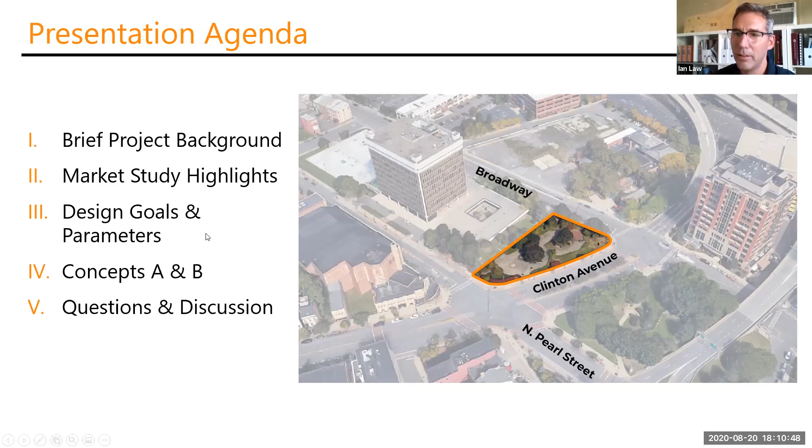In 2018, the City of Albany was awarded the DRI for the section of the city referred to as Clinton Square. After a 6-month planning project, as Ashley said, 12 projects were announced, and this was one of them. The planning process envisioned diverse pop-up retail installments by local artists, signature events, enhanced pedestrian connectivity, and a venue for authentic local and regional experiences. So the market study that's been part of this project has followed to assess the viability of this as that market collective and a viable gateway into this section of downtown.

So I'm going to switch over to the market assessment and review some of the key findings. Please forgive me for reading this piece, because until an hour ago someone else was going to be presenting it, but I'll go over the highlights.

One real key piece has been that it really needs to be multi-level, flexible design elements. So civic spaces that offer terrace seating and performance or pop-up market zones. The reasoning for that is because of the grade change - we'll go over that in a minute - taking one of our key constraints, which is the 16 feet of grade change from Broadway to North Pearl Street, and figuring out how we can make that as flexible as possible. We want to make sure there are opportunities for artists, public speaking, small amphitheater, sculptures, and really extend the functionality and viability of the space.

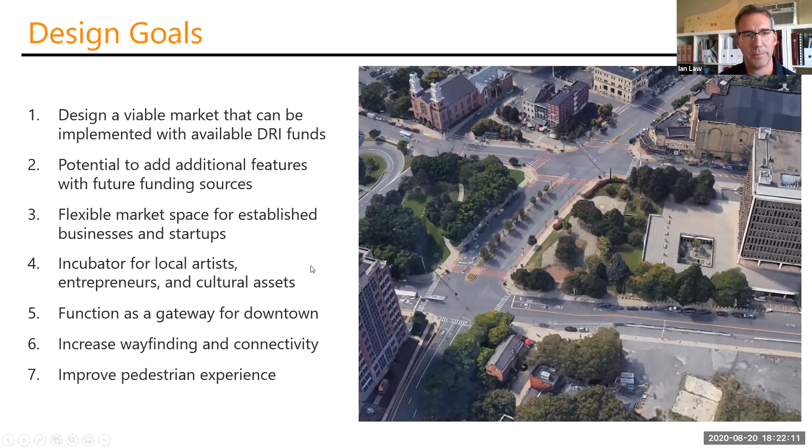There are really three primary things that are critical in understanding this site, both constraints and opportunities. I'll start at the bottom. This is a major hub into downtown with nearly 25,000 people a day passing by. But the nature of this space has it underutilized given its location, so we really want to make sure we're taking advantage of its critical real estate and what it can do to help this section of downtown. We're very excited about that opportunity.

So the real constraints on the site are, because of its history, it was originally the original Clinton Avenue, and as such there's a tremendous amount of historic utilities located directly under our site. They're major hub utilities, and that really restricts us in how we can handle the other big constraint.

That other constraint is the 16 feet of grade change. Between Broadway and basically the intersection at Broadway, and then the intersection at North Pearl, we have 16 feet. The other critical thing to note is the existing sidewalk along Clinton Avenue is not technically accessible. That grade exceeds what would be considered accessible, which means to improve connectivity from Broadway to North Pearl, we need to handle that accessibility through our site.

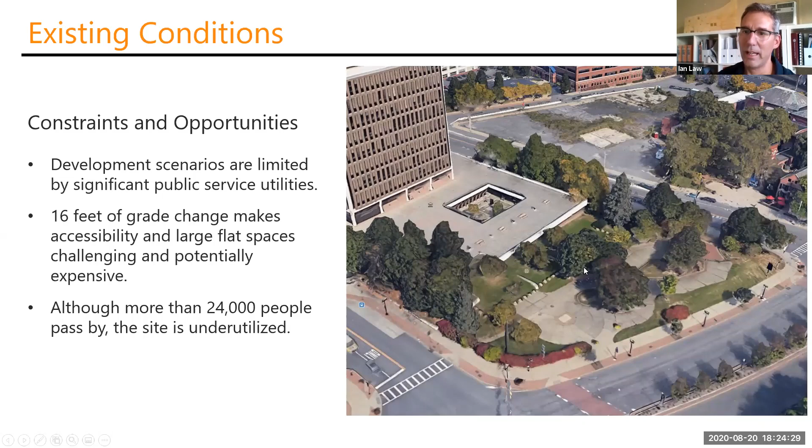To maximize the flexibility of what this space can be, we really have to address this 16 feet of grade change creatively, but we've got to do it without cutting, because we can't get into the utilities. So as you're reviewing the designs, try to keep those constraints in mind, because that had a lot to do with how they were laid out.

So you're catching us at the end of an intensive two-week period, a very messy charrette process. Unfortunately, due to our circumstances, it had to be done remotely. But I think it accomplished the same goals of getting from a very preliminary stage to a pretty refined stage in a very short amount of time, with a lot of back and forth and great feedback from both stakeholders and the folks at Capitalize Albany.

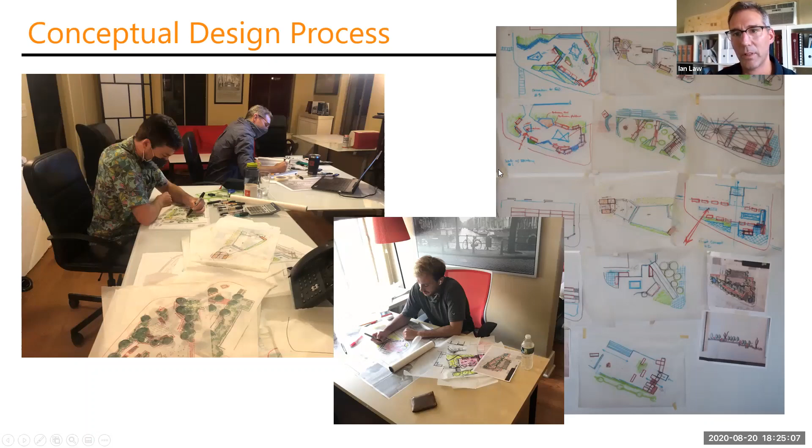So with that, I'm going to jump into the first concept. Concept A is a structure that has three primary terraces, an open lower terrace. This is the one area on the site, this bottom southeastern corner, where we can cut.

As you're familiar with the site today, that's where there's a big berm that really prevents you both visually and physically from seeing into the site. That's something both concepts really wanted to tackle head on, so we've really opened up the Broadway intersection here. We have a lower terrace and a large middle terrace that we've tried to flatten as much as possible.

We've maintained pretty much the existing entry off of Clinton, with handicap access similar to what it does today, but it would snake around and land at this upper area. The other real difference from what's out there today is right now there's about 5 feet of grade change between the sidewalk and the space across from the Palace, and folks have a cow path that cuts through the bushes there. We really wanted to engage the North Pearl intersection and create a nice accessible upper terrace there as well.

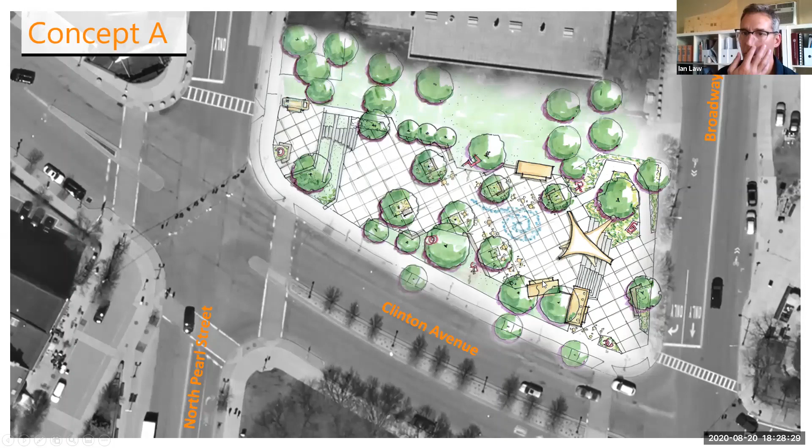And so instead of having big walls, we've tried to handle that with a couple different strategies, using stairs that can be both seating and create a nice open view, but also utilizing the vendor space as modified shipping containers that could veneer those big walls. So we could add architecture without footings, without penetrating or disrupting any underground utilities. This gives us vendor space that adds some on-site architecture to help define the spaces and bring activity for local vendors or artisans in a creative way to make that great transition.

Taking a little zoomed in look, again, key features of Concept A: a nice open plaza at the Broadway Clinton landing, across from the Skyway in Quackenbush Square.

Big monumental stairs with stadium seating, as well as a conventional stair that brings you up. A performance area and shade structure provides shade over that seating and acts as an overlook to the upper plaza, but also a great spot for a pop-up performance to slide under and have a nice, large, scalable plaza space. We're able to arrange movable furniture around this main market space to accommodate whatever size event, so a large event could have folks enjoying it all the way up to the theater, the plaza across from the palace.

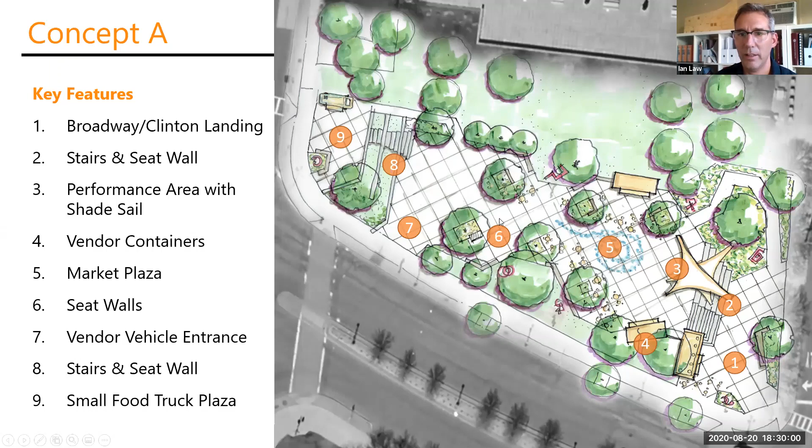Again, opportunities for additional containers, but also the opportunity for food trucks to enter this primary space, tented vendors, push cart vendors, as well as pop-up performances. Another feature we'd like to include, perhaps with some additional funding, is interactive water play, like a little pop jet that could be turned on and off depending on the programming, and provide great opportunities for lighting effects at night.

So let me show you some quick imagery, and then we've got some nice 3D modeling that hopefully will do a better job of showing you how the spaces work.

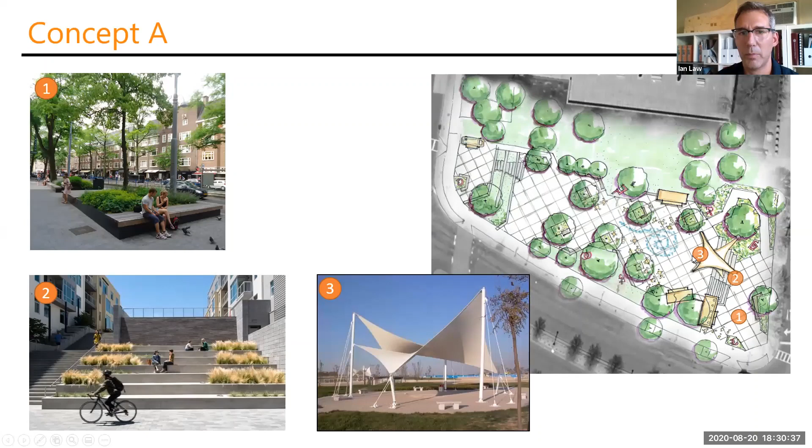Again, in that lower plaza area, nice spots for seating integrated into the landscape. This is a nice example of how the combined stairway with stadium seating could work in this area, and then a featured shade structure that provides shade for the overlook and the stairs, but also allows performances to slide under. Lots of movable furniture, adaptive use of the shipping containers, and then a variety of seating.

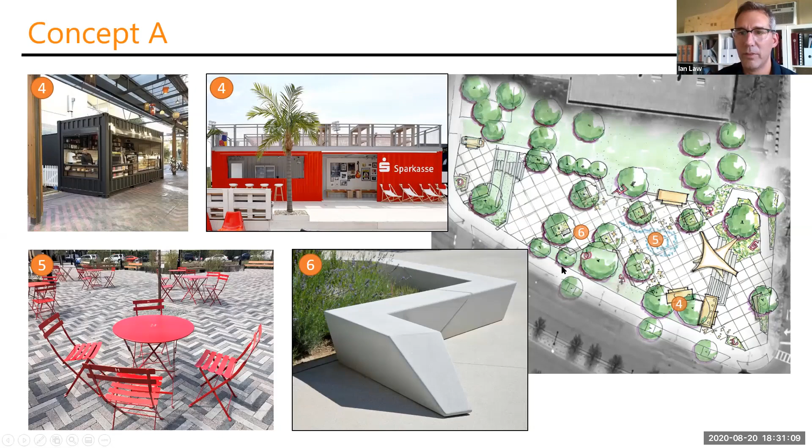We want to make sure this is a place for all people, all ages and abilities. Sometimes the benching might be backless, but we want to make sure we have plenty of seating with backs for our seniors, so they can sit and enjoy and people watch. It's important that we integrate a lot of different types of seating, so we're having something for everyone.

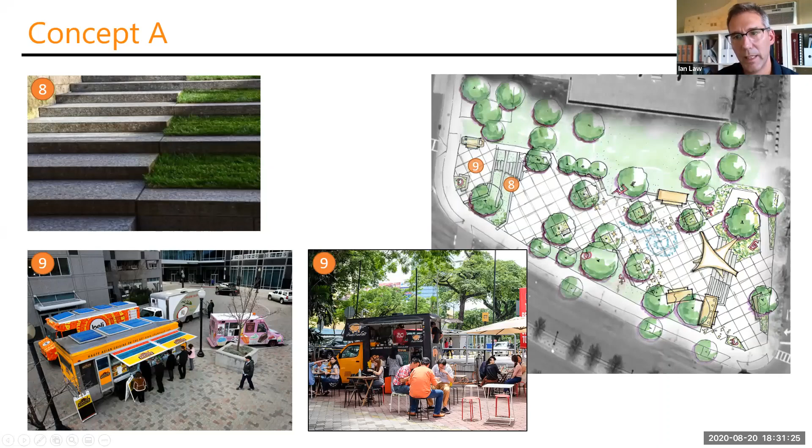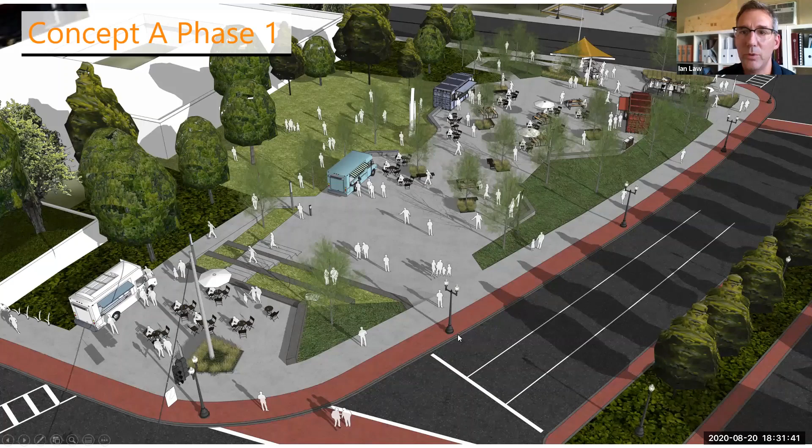As we go through these models, I want to show it to you in two versions. We'll call one Concept A Phase 1, which is the use of our available funding that we have now to achieve a very viable and implementable Phase 1. Then I'll show you another view that shows how we might be able to add on to it, should the opportunity arise for future funding.

Here's a view from North Pearl, looking east back towards Broadway. Again, nice open plaza, transitioning down to another nice open plaza, a great spot for events to put up a larger tent. Again, opportunity for food trucks to come in, and then a nice market space plaza with lots of movable furniture, some adapted shipping containers for vendors, and plenty of space for tented vendors to also set up for bigger programming events.

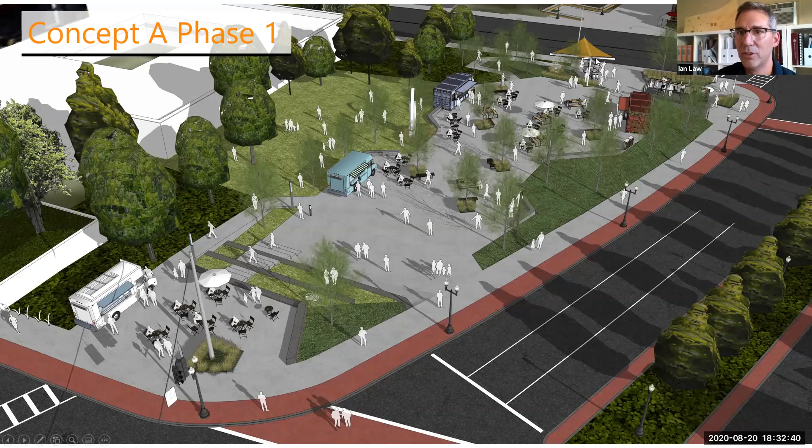And then, preliminarily, we've allocated some money for that shade structure, but there's the ability to add on to it to make it even better as part of a Phase 2. So I'm going to click one slide and demonstrate how that could look with some additional funding.

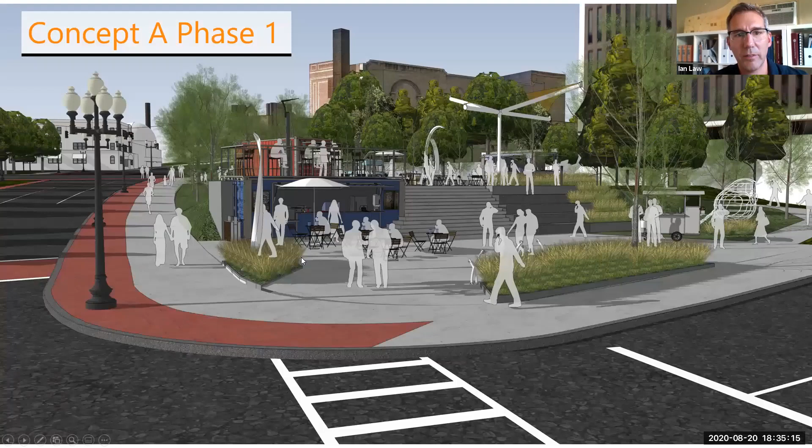But this concept A, I think we can accomplish quite a lot with our available budget, and it's really things like public art and the pop jet which make the big difference. So now I'm going to move to concept B.

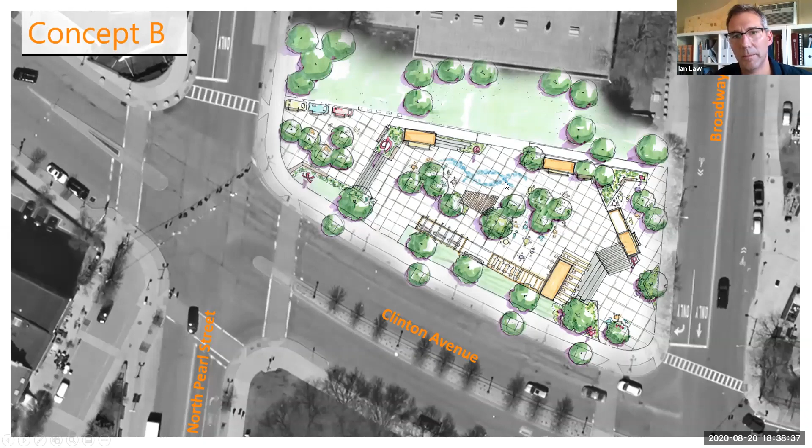I talked through a lot of these already, so I don't need to rehash, but again a big real difference with this one is using the language and being playful with it—the framework and the geometry is the big difference. I'll jump to some of the imagery.

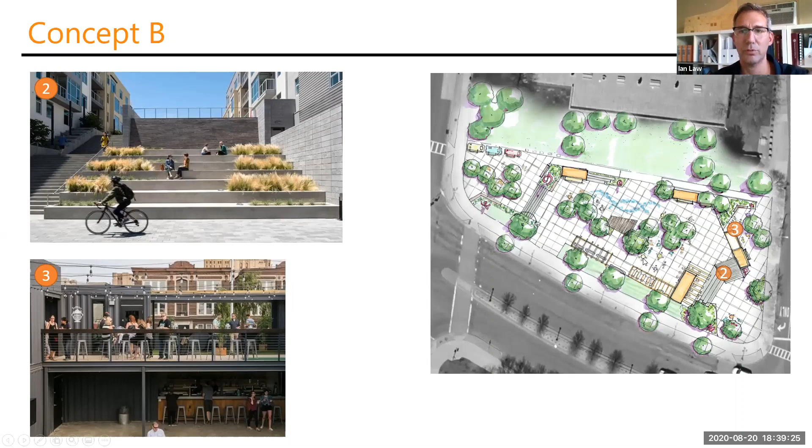Nice example in this photograph of how that stair and landscape could work. Again, how we can engage multiple levels to transition that grade at the bottom here, and really have these containers open up and allow clear views through and into the site, and how just the structure of them can provide definition to the space and add a lot of flexibility.

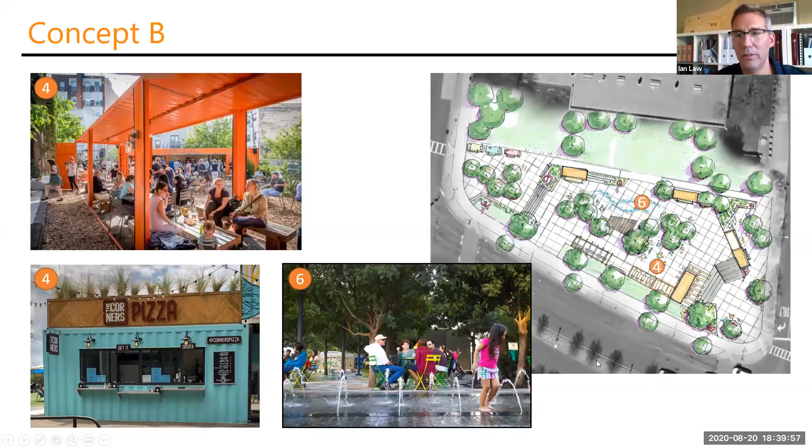And then how we can take those same kind of rigid rectangular geometry and get really playful with it by making it a fun shade structure or some contemporary porch swings. Again, lots of opportunities for food trucks and tented or pop-up vendors.

So we'll go through the same exercise of demonstrating what concept B could be with our available implementation funding, and then what things we could add to take the space to another level. So in this concept, again, we've got some public art, great opportunities for

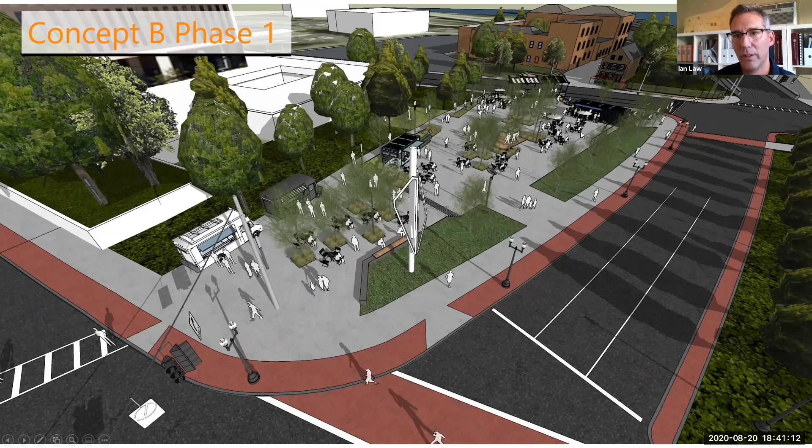food trucks to be able to utilize the space, as well as tented vendors. And we do have 3 different containers. You can see 2 of them here in the upper plaza. But what's missing are those fun creative use of those sort of skeletons that you saw of the container spaces. So the swings and the pergolas, those would have to require some additional funding.

And so you can see how that kind of added definition would happen with some future funding there. But again, great spot for food trucks to be able to pull in and utilize that space. We could add benching along that perimeter, as well as tented vendors. So I think we could really make it work, but the phase 2 piece adds a dynamic element that is certainly a lot of fun and I think would be engaging. You can also see the pop jet would also be part of that phase 2.

More of an overhead view of the phase 1 implementation plan. We have basically 3 containers in this first phase. This one does have the fun kind of 2nd story overlook that engages the upper plaza, while the vendor space would engage the lower. This one is up on the top, and then we have one in the corner, but again, lots of room for food trucks at all the different plaza levels, as well as tented vendors.

This does include the stage and lots of movable furniture and adequate and attractive lighting. And then with the phase 2 funding, again, we would play off of that language and just get a lot more spatial definition on the edge and integrate some fun features into the site, the fountain, and then these fun pergolas, trellis swings, things of that nature, and of course, more opportunities for public art installation.

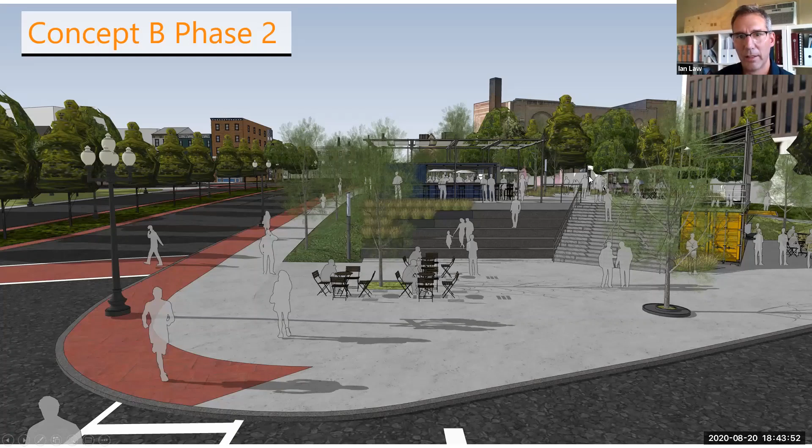up and step it back into the site nicely. And then with the additional funding, you can see how we get a fun pergola structure engaging the container here. You can see the fountain in the background. Again, this is a little better view, bird's eye view of how open and inviting this entry plaza would be.

Again, we can get all of this in the first implementation phase, but then with some additional funding, we can really add on in an engaging way, introduce some water, as well as the fun elements on the perimeter. So that's how we've been really thinking about sort of the implementation phase and then a potential future funding. But we also wanted to talk with you about

kind of taking things to an even another level. So this concept, when last week, one of our earliest iterations of it included a really iconic feature that we think would be wonderful. We can't currently afford it, but it's just something to consider because it could add such a dynamic, again, iconic element to the fabric of downtown Albany and really be a significant attraction.

And so we should consider elements like that of things that we have to weigh out, of course, operation and maintenance and budgets and how things like that would be paid for against what it would do for both the site and the surrounding area as an attraction.

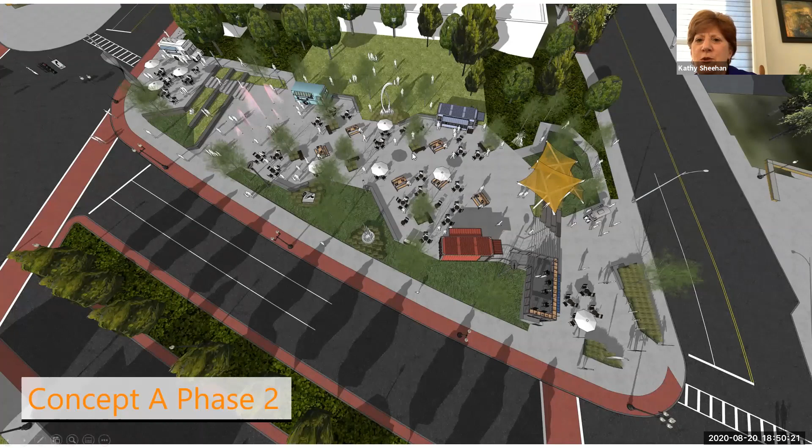It's funny you talked about your little water feature at the end, because when you looked at concept A, if you go to the slide where you see it from Broadway looking at it - do you have that slide? There, where you have that seating space, which I think is a cool idea - the first thing I thought was, oh, that would be really cool to have a waterfall right there. So for whatever that's worth, when I looked at that I thought, if you were driving up and saw a waterfall, like one of those infinity waterfalls, that would be really kind of a cool thing to think about. Love that idea.

So I think those are really good points. I think the point about noise is a good one.

You know, it's certainly an urban space and we've done, I think, a better job of engaging it and opening it up both visually and physically, at the top and bottom, as well as the primary space. That might be the one benefit of the space being elevated in the middle—you have some earth separating you from the traffic, which is a decent absorber of sound. But those two things kind of don't work so well together: opening it up visually and physically, and then deterring the sound.

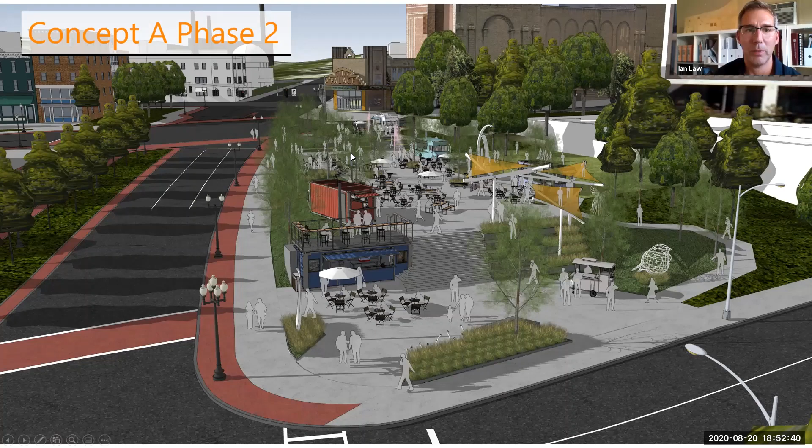So I think things like water with the pop jet helps. Having music going in the space, whether through speakers or live performances, can help drown out the natural noise happening in and around the site. I think we're going to have to celebrate that it's an urban space and make the best of it, utilizing strategies that can help distract people, so they're so engaged in the experiential qualities of the space that they don't focus on the noise as much. But I do think that's an important thing to consider.

Aaron Corman has a question.

Maybe I need to move. The visions that you're showing here are reminiscent of a number of different parks in downtown Portland. So I'm guessing you've been to Portland, you've seen some of the parks they have there, and maybe you're trying to emulate some of their successes.

Well, Aaron, that's a really interesting comment. Interestingly enough, Andy Bone, my business partner who is on the call, and I did visit Portland as part of a college trip quite a long time ago. But I think Portland's always been very progressive from a design standpoint, in how they engage topography, but also just the public realm in general.

Well, exactly—so I was going to say the fact that you have to deal with a steep slope and accessibility reminds me a lot of Pioneer Courthouse Square, and the way they built a ramp through the middle of their amphitheater there. Yeah, that actually came up several times as we were talking about it. We kept referring to the ramp and stair in Portland.

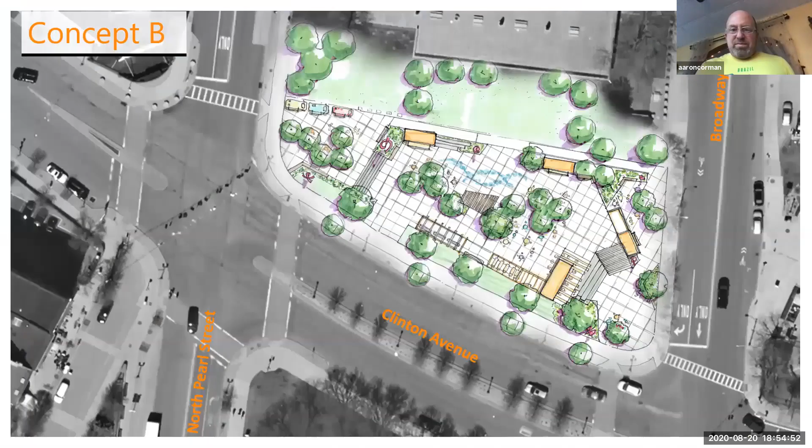So it looks like the mayor had to jump off, but we're grateful that she was able to make the time to join us. If anyone else has any questions or comments, you should be able to unmute yourself now. And if you're more comfortable putting the questions or comments in the chat, you can do that as well.

This is Dave Ashton. I had a question about the eastern end, the Broadway end. Could you talk a little bit about the connection to the Skyway on the other side of Broadway, and how this relates or plays off it, what the synergies are, and organizationally—you can imagine a family turning up on this corner with bicycles and whatever their load is, to go across the Skyway to the waterfront for a bike ride or whatever. It's hard for me to get a sense of what it would look like if more people were gathering there. Is it a good logistic space? Is it designed for that? That's the kind of thing I was curious about.

David, that's an outstanding question. One of the real limiting factors about how the Skyway lands on that eastern side, just off screen here to your right, is they don't have a lot of space—they're landing almost right at the intersection, and they're very limited in how much they can impact the Old English pub area there. So from a staging standpoint, they really don't have that much real estate to work with. That was one of the sentiments Capitalize Albany shared as well—that our designs need to accommodate that, so just across the crosswalk there's a spot where people could stage, settle, and land, whether they're coming from the Skyway or going to it.

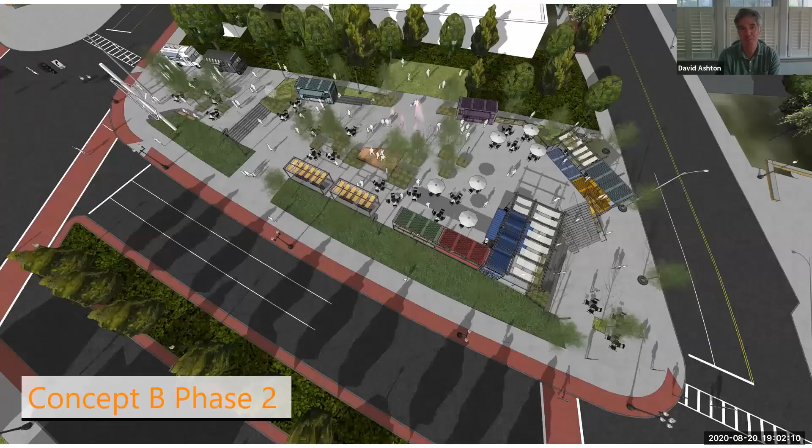If no one else is going to comment, I have one other thing. I find, looking at these concepts, my eyes drawn to the public art, and I find that very impactful. That may just be personal preference, but it's too bad there isn't budget at the moment for the public art, because my eyes drawn to that bird, and that bird elevation at the west end in one of the scenarios. That's just where my eye goes.

Thank you for pointing that out. In both concepts, as part of the phase 1 budget, we do include some public art, so you're seeing some there - I think the bird is down at the bottom. We have an allowance in. Andy, if you want to jump in and remind me what that phase 1 allowance is for public art, but both concepts do have a phase 1 public art budget, and then I think we double that for phase 2, and that could just keep going as we're hoping to always be refreshing the site. We are trying to make sure there's at least some budget allocation for this first implementation stage, because we totally agree with you.

Yeah, this is Andy from Place Alliance. So for the public art, it's one of those things too that can grow. We want to make sure there's money in this phase 1 for it. I can't remember exactly what we held, but we tried to hold a decent lump and then double or triple it for phase 2. But as long as it's thought out as to where it can go and how it interacts with the space, I think it gives the opportunity for that public art component to grow.

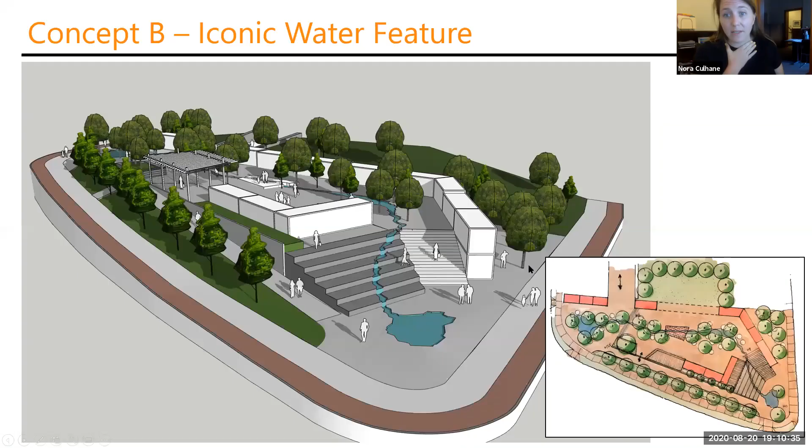Hi, this is Georgette. It's been really neat to see how you've taken input from folks as well as budget constraints and still came up with a pretty cool 2 concepts. So I imagine that was extremely hard, and I understand the challenges of the site.

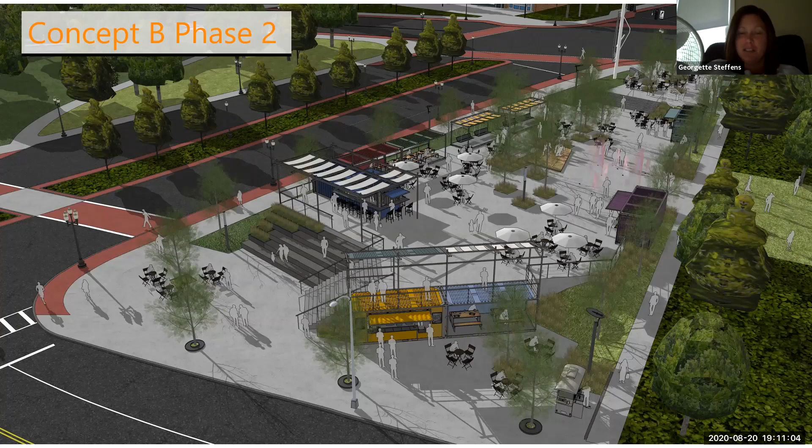A couple things. I would ask that you think about maybe additional electric, even if it's not near—you probably already have, but we're really challenged in our parks. Most of them don't have electricity. So to be able to do any lighting or holiday lights or events with musicians or other things, we're really challenged by that.

And then I actually really like concept B better, but I feel like phase 1 doesn't feel fully complete. I totally get the phase 2 of that, or all the bells and whistles and the fun stuff. I also like the landing on Broadway better in concept A, because I feel like the container is more visually obvious. The one in concept B sort of is tucked around, so you don't see it as much when you come off the highway. And really, if you don't have the phase 2 stuff, it may not draw your eye as much, or know that there's things for vending there. So that's just my thoughts.

But I think within the constraints and the challenges you have, it's very exciting. And so we're excited to partner in any way we can.

Thank you. Great comments. And that was another thing that Capitalize Albany emphasized, as well as our market team—the need for electricity, for Wi-Fi, to be able to sit, whether it's having a spot that you could literally plug in and work from within the space to, again, extend that dwell time, as Ashley was referring to. We want to make sure we're considering all those things to really make this of this time where that connectivity is so important.

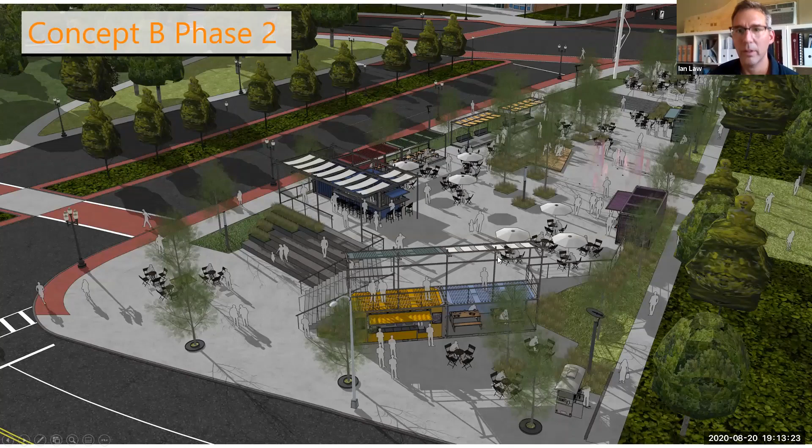And again, maximize the flexibility of the space, so that you're not just locked into having a performance in one spot, or that vendors are only precluded to being able to plug in one area. We've got to make sure there's lots of opportunities for that, so that surely will be accommodated.